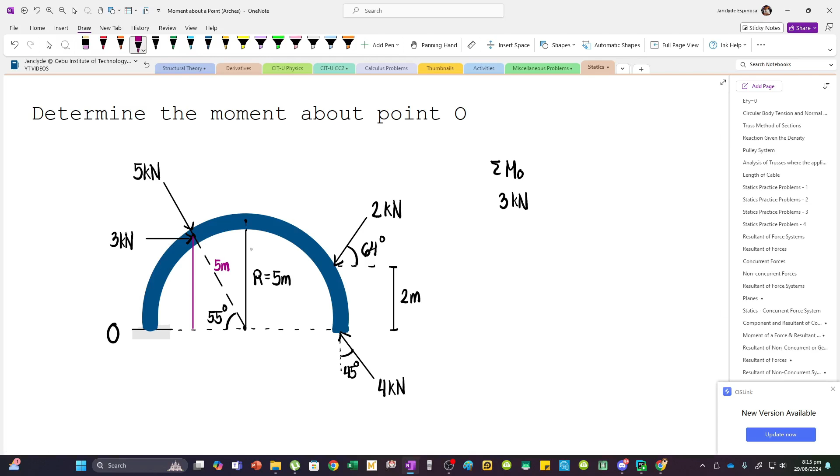So if this is 5, para itong hypotenuse ng triangle na to. So this is the opposite side to the hypotenuse. Bala, itong distance pala na to is 5 sine 55. So 3 kN multiplied by 5 meters tas sine 55.

Then, after which, we have the 5 kN load. Ito. Now, para madali, apply na lang natin yung principle of transmissibility. So yung 5 kN na load, since nag-act yan toward the center of the circle, then we can just transmit it, transfer natin siya through its line of action. So pwede natin siyang i-transfer dito.

Yan, pwede natin siyang i-transfer dyan. Now, if ito na yung 5 kN load natin, we transmitted it dito.

So meron siya, diba, horizontal component, saka meron siyang vertical component na nag-act sa center. Now, if na-transmit na natin siya, its horizontal component already hits point O. So ibig sabihin, yung horizontal component pala niya, walang moment arm. So hindi na yan magkukause ng moment.

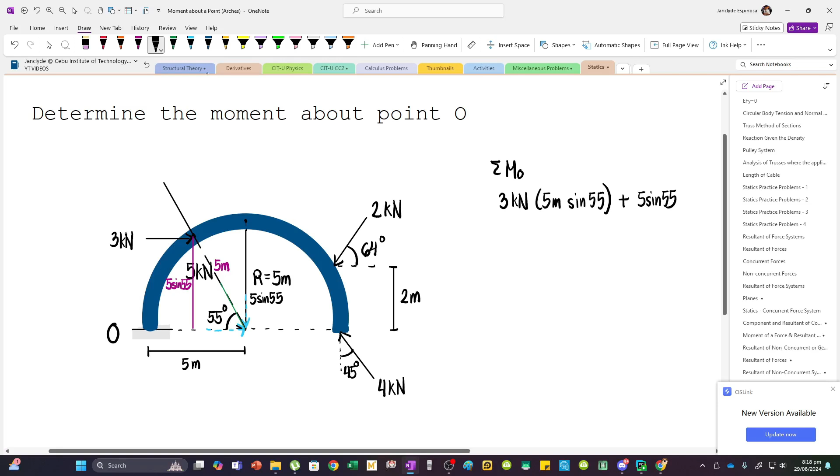Kasi yung rotation na makukause ng downward force na to about point O is clockwise kasi. So multiplied by moment arm natin na 5.

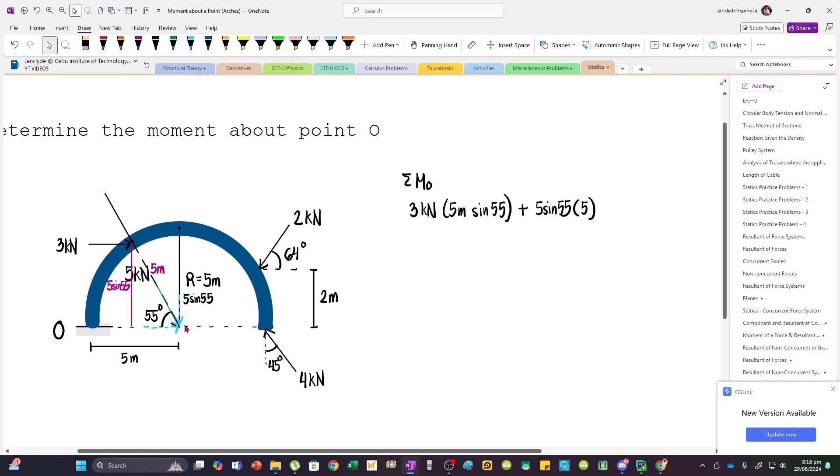Ayan, and then next, dito naman tayo sa 2 kN na load. Now the 2 kN load is inclined 64 degrees from the horizontal. Now hindi yan siya tatama sa, sa center. So yung gagawin natin is ito.

Alam natin, 2 kN acts, by the way, dyan essentially yan nag-act sa center ng arc natin. But anyway, mamove natin siya sa along its line of action. Now if we will draw a line from the center patungo sa point na to, diba, ito yung radius. Yan. Now ito, alam natin na this is what? Diba, 2 meters. Ito yung distance na yan.

Pag i-project natin yung line na to, dito. So pwede pala natin i-project yung force natin. Bala, ito yung mangyayari.

Yan, yung line of action ng force na to is this one. And then, this is, sabihin natin, alpha. Ito naman, this is 64 degrees. Yan. Now, paano natin masosolve yung alpha?

We have the radius, di ba ito, yung distance na yan yung radius. Alam din natin yung opposite side to angle alpha. So, masosolve natin siya. We can use the sine function. So, sine alpha equals opposite side 2

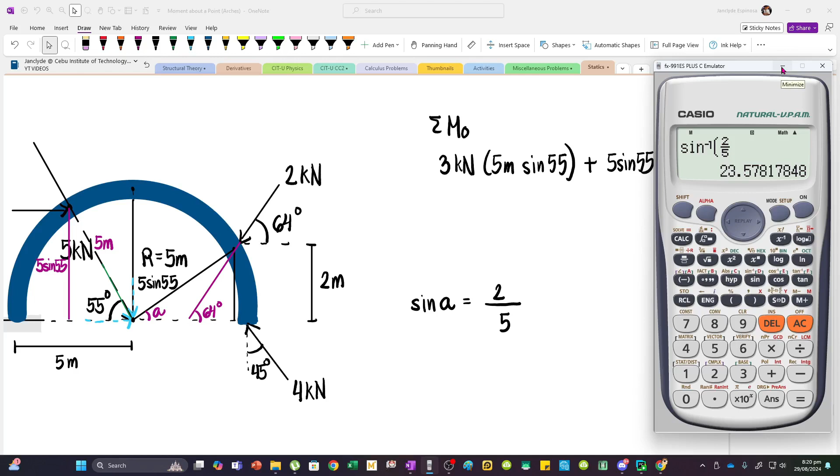divided by the hypotenuse, which is the radius. So, 5. Yan. So, arc sine ng 2/5, we have 23.58 or 578 na lang. Yan. So, alam na natin yung angle.

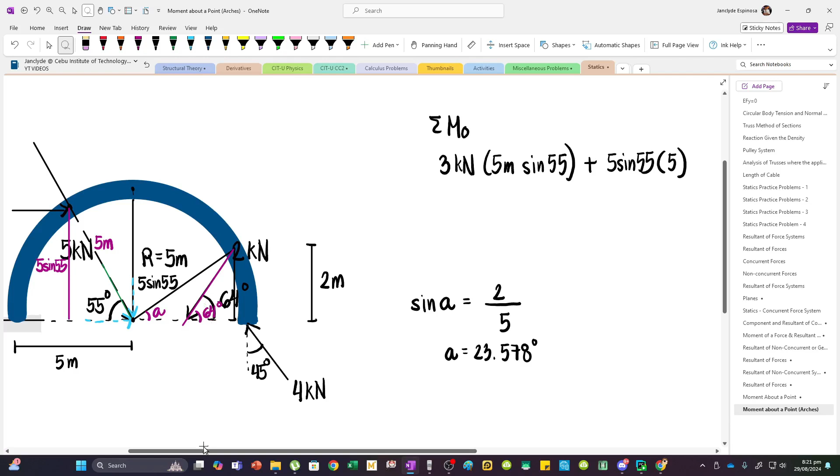So, after which, we can now transmit this load. Yan. Transfer natin siya at this point. Ayan. Transfer natin to sa baba. Para yung vertical component niya, yan na lang yung magkakos ng moment about point O. Kasi yung horizontal component niya, tatama na yan sa point O.

So now, this has horizontal component equal to, vertical pala, parang 2 tas sine 64. Ayan. And then our perpendicular distance patungo sa point O is 5 plus itong distance na to.

Yan. Now, yung buong distance na yan is 5 cosine alpha. Diba? So, itong distance na to from here up to this projected line, that's 5 yung hypotenuse, then cosine alpha.

Yan. Now, we have to subtract this distance. So, itong distance na to, this is essentially, masusolve natin siya gamit yung, meron tayong opposite side, kailangan natin yung adjacent. So, balat, tangent pala. Now, considering this triangle, yan, color natin, ito, yung triangle na yan, we have tangent of 64 degrees equals, opposite side is 2. Diba? 2 man yan.

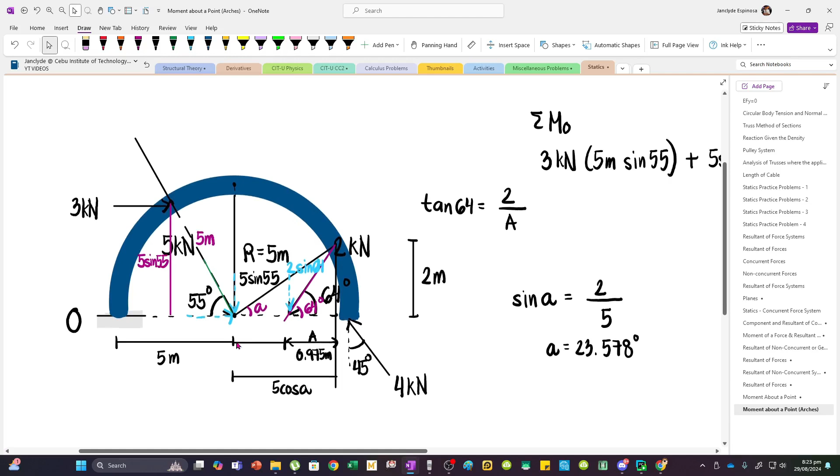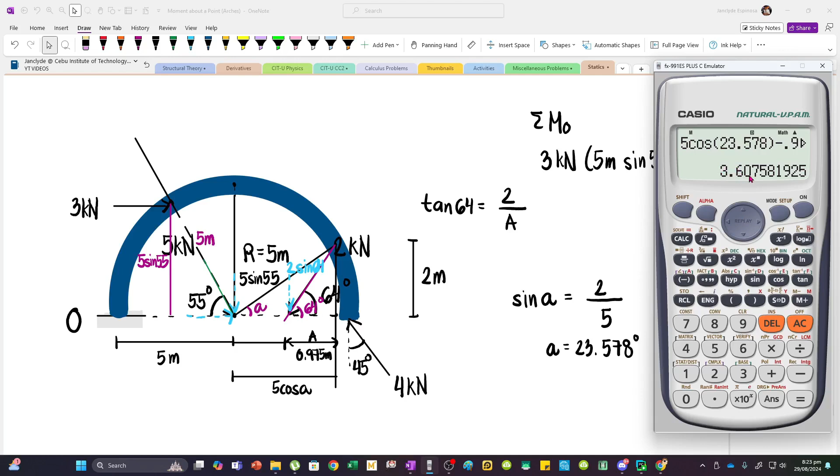So, if this is 0.975 meters, yan. Ibawas natin siya sa 5 cos A, makukuha natin to. Yung distance niya yan. So, 5 cosine alpha, again, alpha is 23.578, and then minus 0.975. So, 3.608 pala. So, after nito,

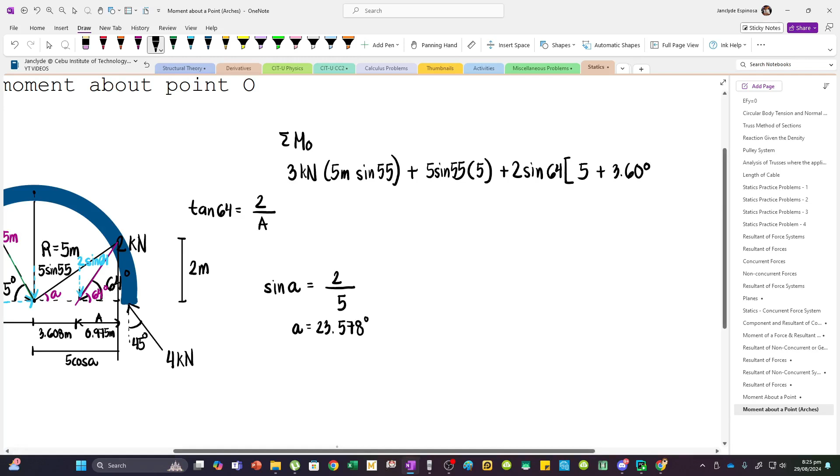we can now take moments about point O using this load na. So, we have 2 kN, balat 2 sine 64. It will still cause a clockwise rotation about point O. So, plus pa rin, 2 sine 64. And then we have moment arm is 5, eto, plus 3.608. So, 5 plus 3.608. Ayan. Parang 5 plus 5 cos A, bawas natin si 0.975. Yan.

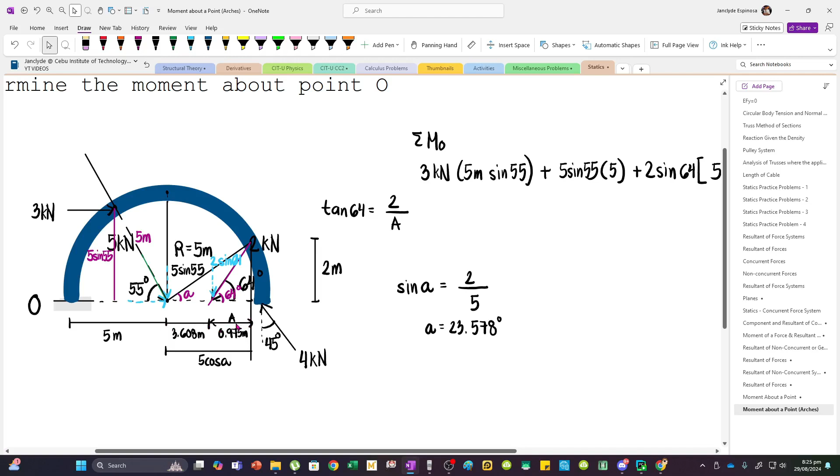And then after which, we have the 4 kN load. By the way, unit ng moment natin is kilonewton multiplied by meter. Di ko na lang sinala sa remaining forces. Now, for the 4 kN load, this has a vertical and horizontal component. So, bala ito.

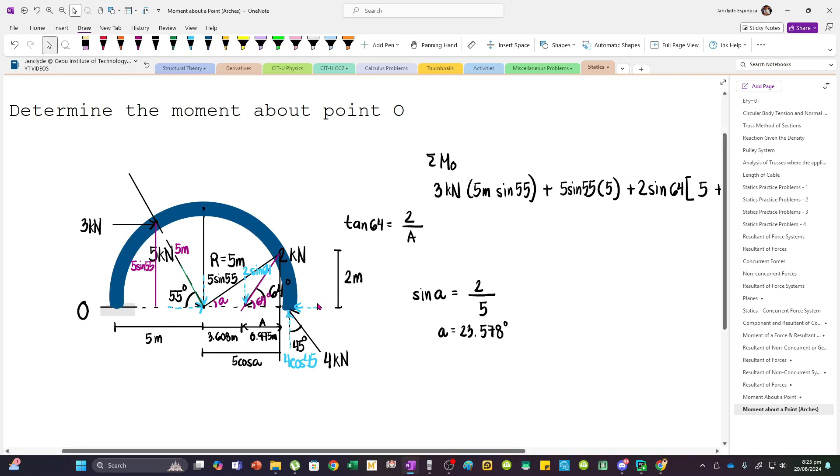Meron tong 4, this is 4 cos 45 kasi angle natin is with respect to the vertical. This is the adjacent side. And then, we have an angle, another force acting horizontally, which is 4 sine 45. Now, the horizontal component of the 4 kN load, tatama sa point O. So, wala siyang moment arm, wala siyang makakause na rotation. But the vertical component is 4 cos 45. It will cause a counterclockwise rotation about O.

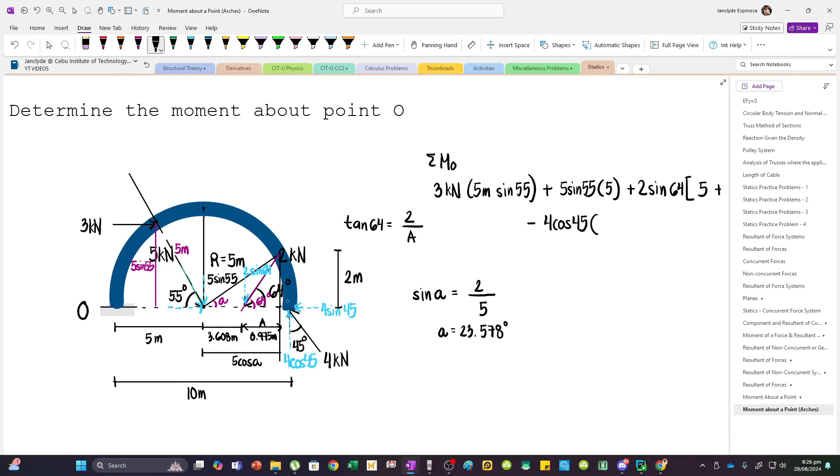Kasi pag ito yung hawakan mo, apply this upward force, the rotation is counterclockwise. So, minus 4 cos 45. Then, multiply natin by its moment arm. Now, andyan kasi yan sa center nag-act. Yan, sa dulo pala. So, this distance is 10 meters, equal to the diameter of the circle. Kasi 5 plus 5 kasi yan, patungo dyan. So, multiplied by 10. Ayan.

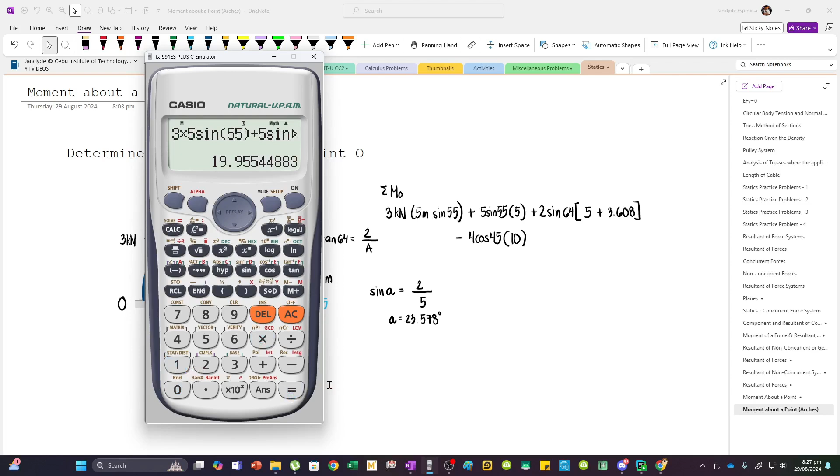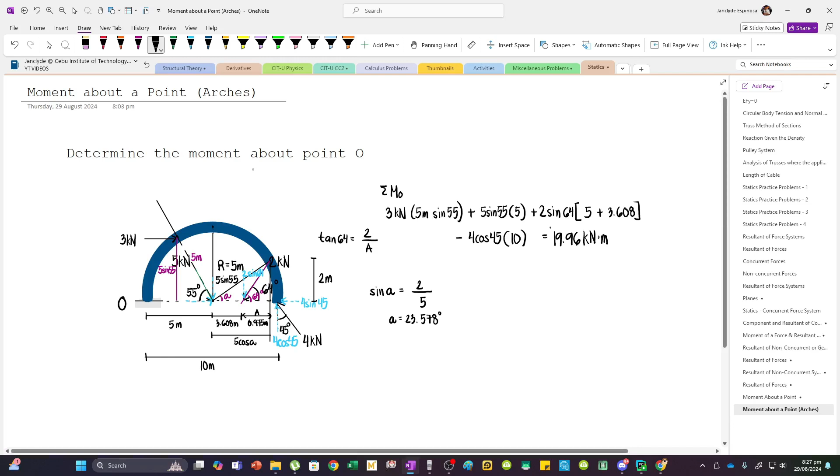So, total natin lahat, we have 3 times 5 sine 55 plus 5 sine 55 multiplied by 5 plus 2 sine 64 multiplied by 5 plus 3.608. Ayan. Then minus 4 cos 45 multiplied by 10. So 19.96 pala. Ayan. And then our unit is kN m, kilonewton meter. So ito na yung moment natin.